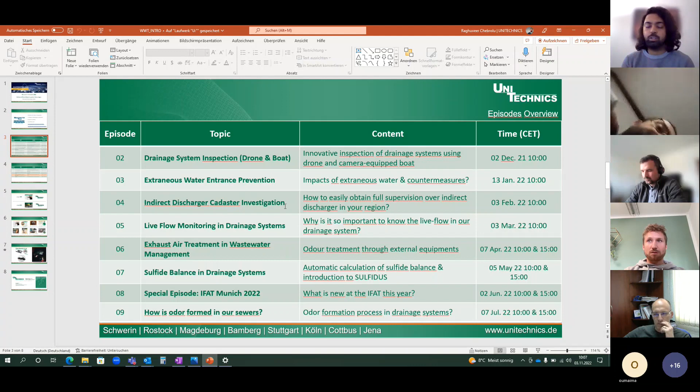So today, as you can see, today is episode 13. It's called Outlook of Futural Sewer Inspection Technologies. And so today we are going to talk about the drones and the inspection technology.

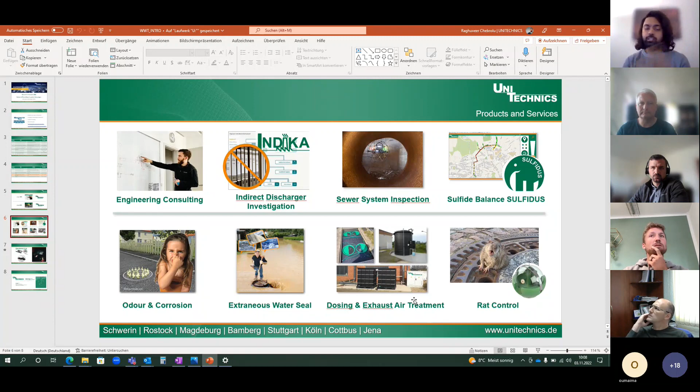So today we are going to do Uni Inspector, which is by Unitechnics. It's also doing the drone inspection together with Inspect Drone.

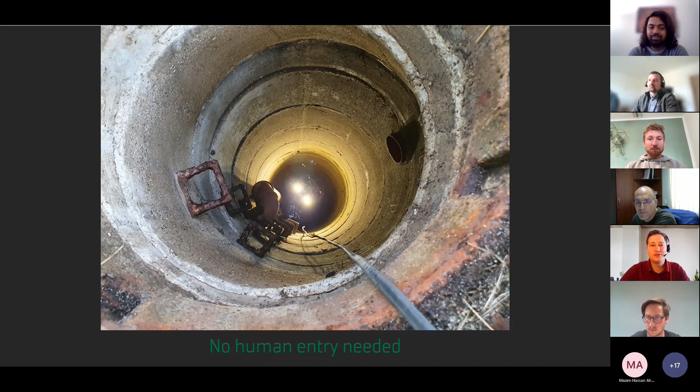And what we can make out of that, I just want to give you a few impressions like this. It's not a moving image, it's just a still image, but you can imagine the water flow on the bottom. It's not something where you want to or even can stand in. So it's a perfect place to fly a drone in. The image that you see here is a real world image taken by the drone. It's not staged or anything. 100% of the lighting is done by the drone. So I think that gives a good idea of what's possible at the moment already.

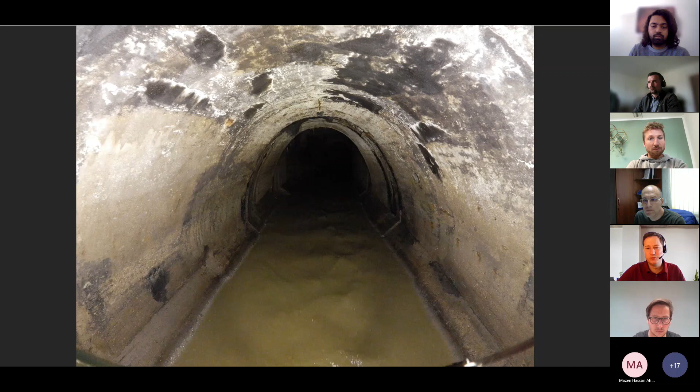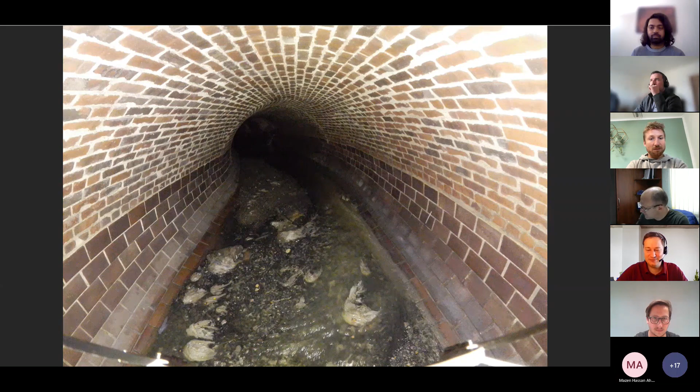Some more nice images of what the world underneath Germany looks like, at least in some towns. All kinds of different profiles here. All kinds of challenges, of course. Not the easiest way to bring a drone inside the sewer, not the easiest place to fly around. As you can surely imagine, there is no GPS assistance. So the drone relies at the moment on its sensors, distance sensors or optical sensors. I will get into the technical details of the technology that we're using in a bit. Just wanted to start with some impressions, get you into the flow.

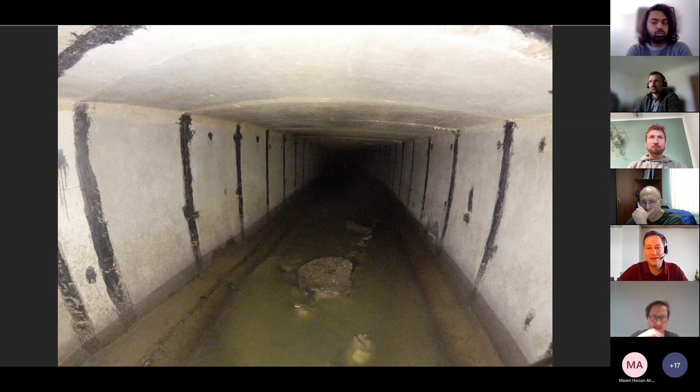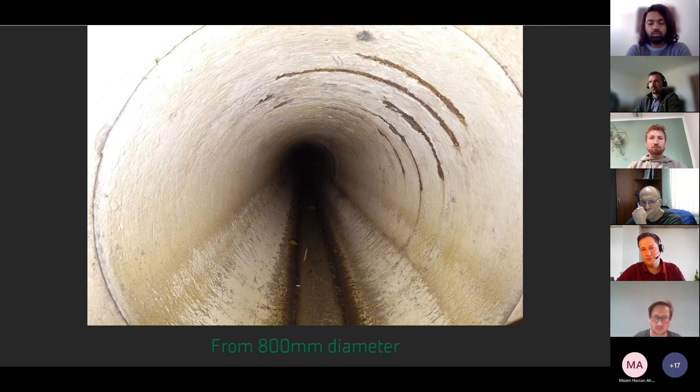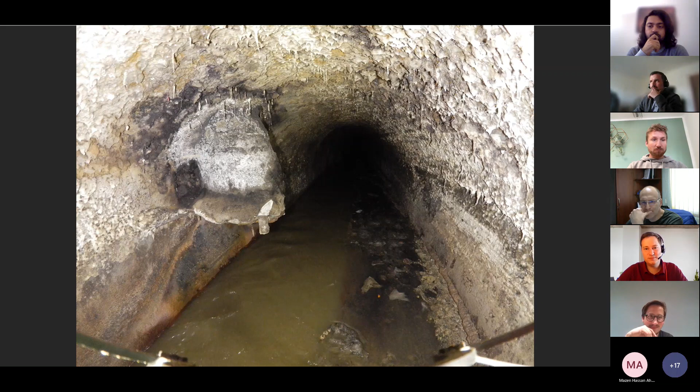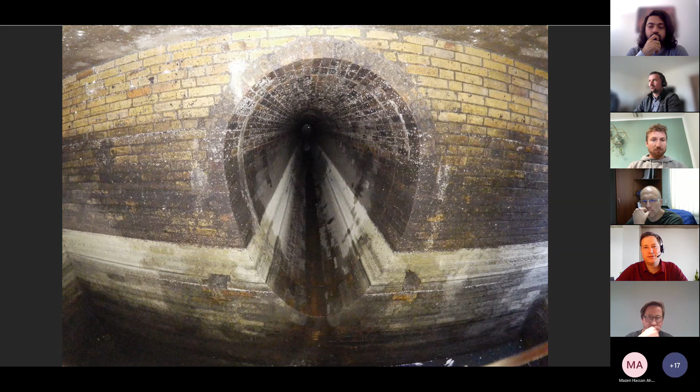Doing inspections at the moment starting at 800 millimeters diameter. There's basically no limit on the upper end. We get to see some places that are quite interesting, I would say. Really interesting, all kinds of places. So that is, let's say, the current possibilities, or what we've been doing for the past 2 years with the drones that we have at the moment.

Just realizing that I forgot to put in the specs of the current drone, but maybe some of you have had some contact with drones in sewers or drones in industrial assets. You might have heard of Flyability. It's a Swiss drone manufacturer. They produce specialized drones for indoor inspections, and for the images that you've seen here, we're using the Flyability Elios 2 drone. It's highly specialized for these confined space environments. From our experience so far, it's the best drone on the market at the moment for these tasks.

There are actually others coming up with new products, but it's still a very small market. It's a very dynamic market. There's lots of development, and well, the latest I'm going to show you.

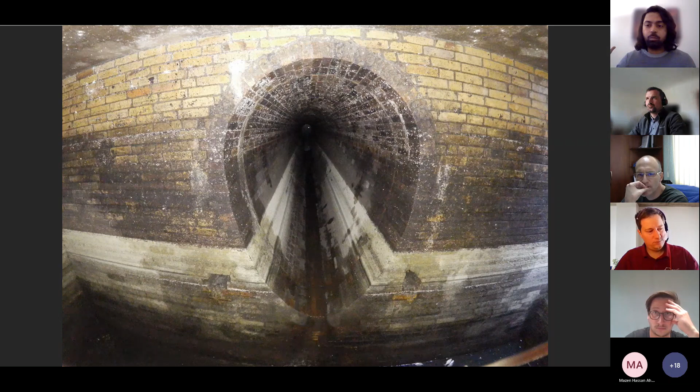In some projects, customers say the structure is so many years old and the plan is outdated. They don't even have a plan, and some are from before World War II. So these structures need a new plan. They want GIS data and a plan where they can see all the measurements, something like 3D and 2D pictures which can be used to make a report, or to reactivate or restructure the structures or basins.

So in these cases, we mostly use drones instead of people. Like Simon said earlier, there are two kinds of drones: Elios 2 and Elios 3. Elios 2 has a small diameter compared to Elios 3. I guess Simon has the pictures later. I will, I think it should be on the next slide. That's why I'm sticking with this image here for so long.

Okay, then I'll give back to Simon. Sorry. Thanks a lot for the additional information. No problem. Right, underground structures is the word I was looking for.

So in this case, I think there's no possibility to enter directly into this structure. You have to go through the egg profile. All right, let's go forward. There's something interesting as well.

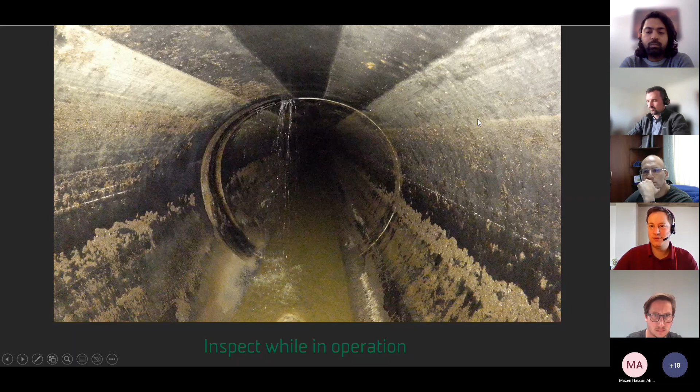Right. So one more thing that we are doing in wastewater plants is inspection of these fouling towers or fouling structures, fouling tanks. Once again, you don't need human entry. You don't need scaffolding in here, as long as you don't do any mechanical maintenance. You just want to know, is my structure doing well? Are all the screws in place? Are all the stabilization constructions in place? Is there corrosion or something? We save our customers a lot of money by just flying in there and not needing any scaffolding.

In this example here, everything was fully pumped out. We've also been doing inspections where you had a few meters of sludge still inside. So of course, doing it manually was completely out of the question, but emptying it even more would have been too expensive. So we just inspected the 80% which was above the sludge line, giving really good results here. Actually, the drone that you see here is the one that I'm going to talk about.

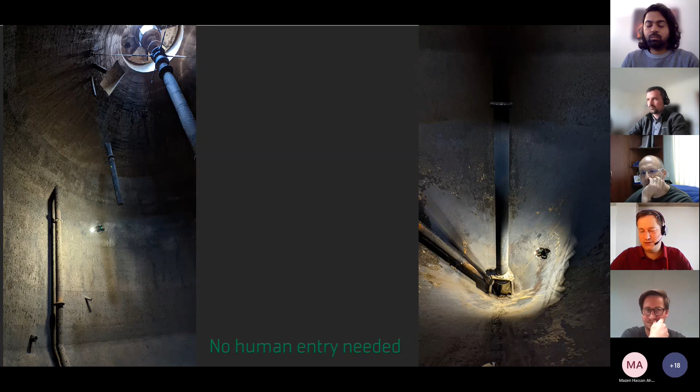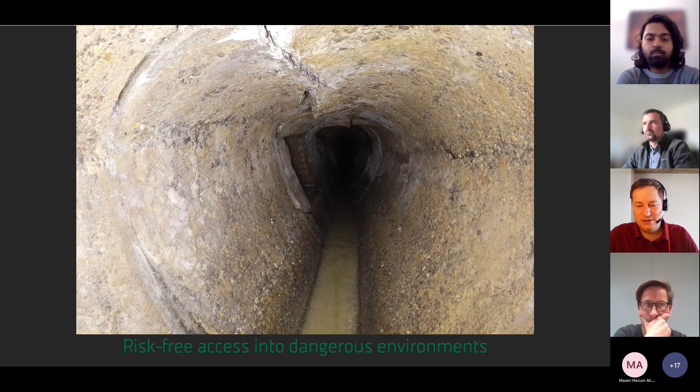Also a very good example, I think, of why using a drone does very much for the safety of workers. Obviously, this here should not look like this. It's a pretty dangerous environment. Also here we have a broken-in part of the earth around the sewer. I think it's a canalized stream here.

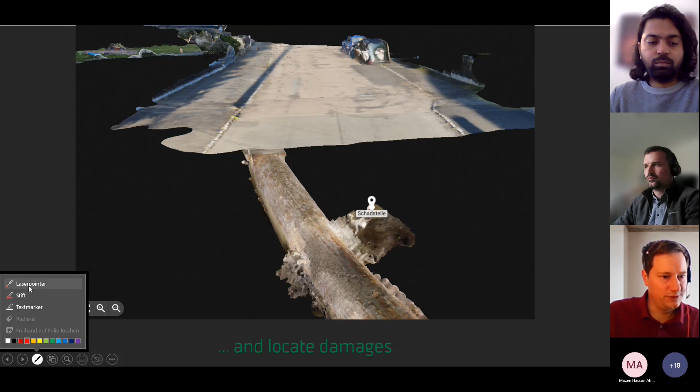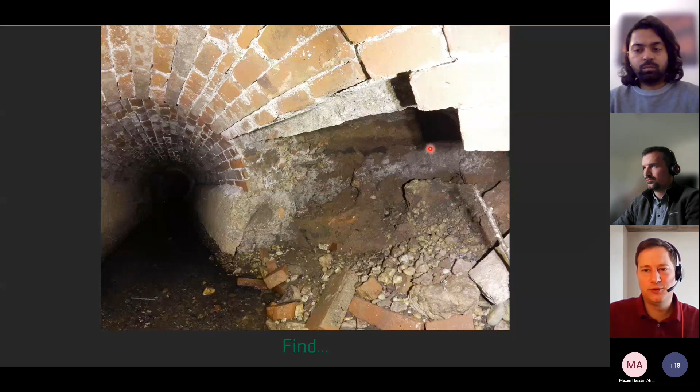And of course, we don't only want to find this, but we want to locate damages. That's one thing which started about 2 years ago. Technology made it possible to locate the damages in 3D models. What you can see right here is a combination of a photogrammetric model of the sewer, which you see in the lower middle. Right here you have the sewer going under the road, and right here is just what you've seen on the right. This damage, we've been flying even closer and looking up, and it's almost going up right underneath the road surface.

So here we combined this 3D model with image data from a drone flying on the outside. That makes it possible to have perfect georeferencing. So with this point that is set here, you can have the georeferenced coordinates. You can send someone with a GPS device out here and actually pinpoint the place on the road where this hole is. In this case, they went ahead and directly closed down the part of the road where the hole was, and started excavation, I think, the following week, to avoid any dangers of the road collapsing.

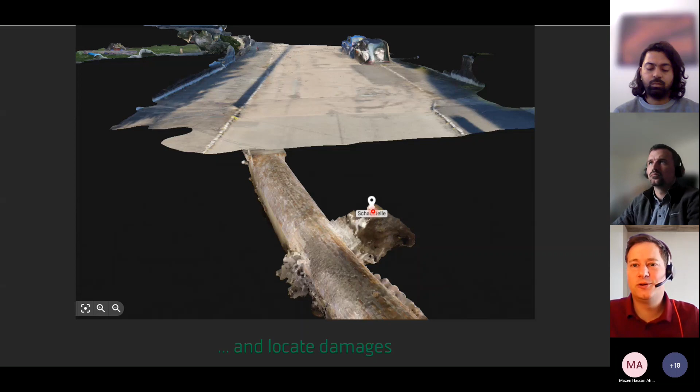And I think it also shows one of the great advantages of using a drone. It is very quick. For this whole project, including flying several times into the sewer, flying on the outside, producing the 3D model, and getting the exact coordinate, it took maybe 4 hours, including all computer processing. The flying itself was maybe 25 minutes maximum.

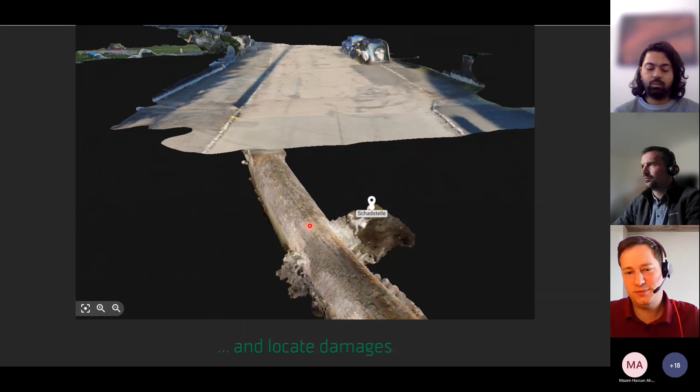One really cool thing, just because it makes it so much more interesting: you get into places that are basically unknown. These parts of your sewer system that nobody dares to go in, so you find these interesting structures like this pipe here going right through the middle. Nobody really knows if the pipe is still active. A few meters back here, there was a pipe which was not connected to anything. Always good to know what's underground.

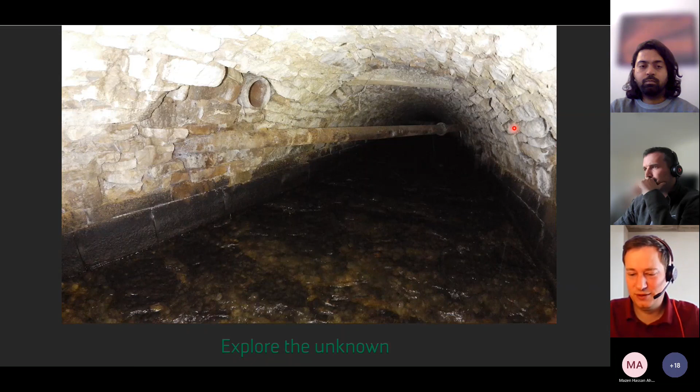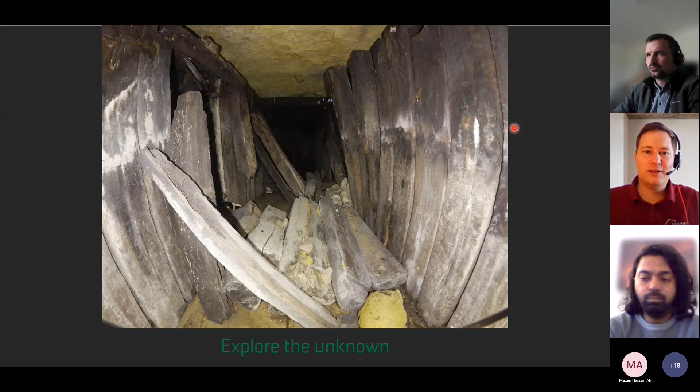I think this is one of the last examples from the old data, where we explored a World War II air raid shelter, which was accidentally found underneath the road. And as you can see, that's not a place you want to go in manually. Already broken down. Mostly you can see on the ceiling, it's the bare sandstone, or not even stone. It's more like compressed sand. Definitely not safe.

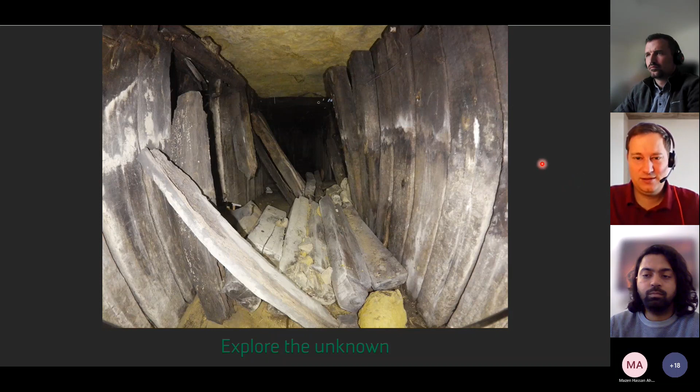All right, but we want to talk the latest technology, of course, and here we have the Elios 3 drone, which is the latest drone from the manufacturer Flyability. We've been operating this since April of this year. We've been involved from the side of Inspect Drone directly in the development, so we had a bit of early access. And what makes this drone completely different to everything before is mostly the payload. This drone is constructed to carry payloads, and especially what we have right now is a LiDAR laser scanner module.

This allows you various things. Most importantly, it allows in-flight localization. So you have a live 3D map of the asset that you're flying in, and you have the exact position of the drone inside the 3D model. This allows you to exactly know where am I, where have I been before, so you don't miss any spot when you're trying to get full coverage of the whole.

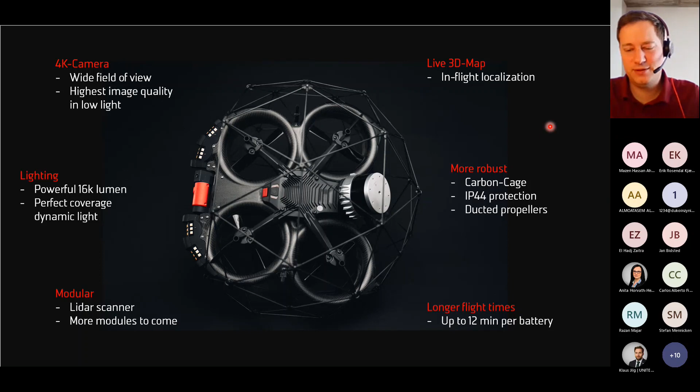And now, what's interesting is, of course, the data. I've got some examples for you here. The laser scanner allows you to do survey grade laser scanning, so you have very high resolution laser scans. The scanner is an Ouster OS0 Pro-32 laser scanner. If anyone is from that field, you probably know what it means. To everyone else, it's an industrial grade laser scanner, scanning around 150,000 points per second. It's a 360-degree rotating laser, picking points in any direction.

And what you see here is a large ducted stream. On the right side here, it's coming from outside. It's going underneath the road.

You have entrance, manhole here. You have a bigger one right here. And with this data, you can see it's not perfect here in this instance, but here there's a transition from one profile to the next. There's another transition right here. I think there's a transition hidden somewhere behind there.

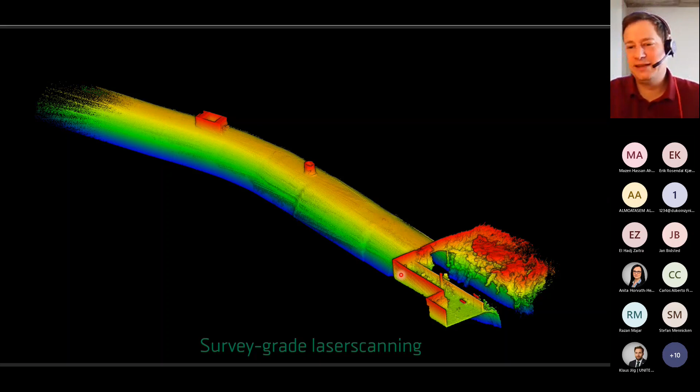So it's the perfect tool for really surveying any constructions which are pretty old. In this case, I think it was built in the 1910s or 1920s. And of course, you can imagine that the town above the construction here has changed a lot since then. The plans are still the original plans, but you never know. So it's a perfect way to update your plans.

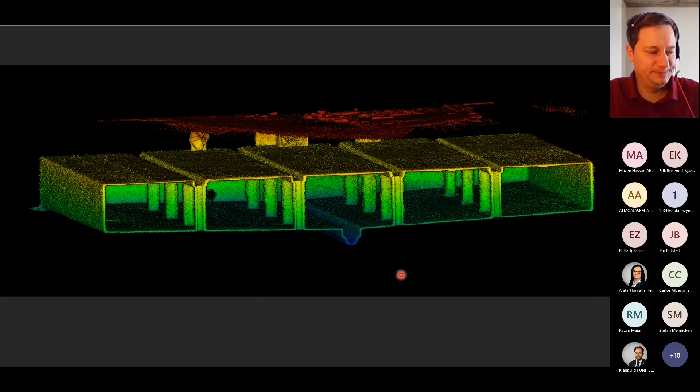This is from a rainwater retention basin, a very nice example, I think, showing again the great advantage. You have lots of pillars in here. If you would like to scan it manually, you have to place your stationary laser scanner in lots and lots of places just to get a good coverage of all the pillars.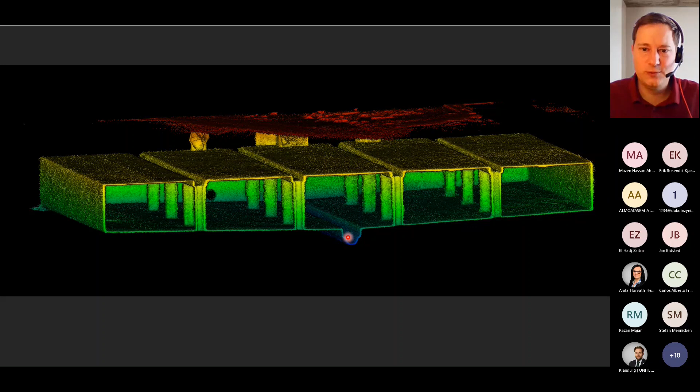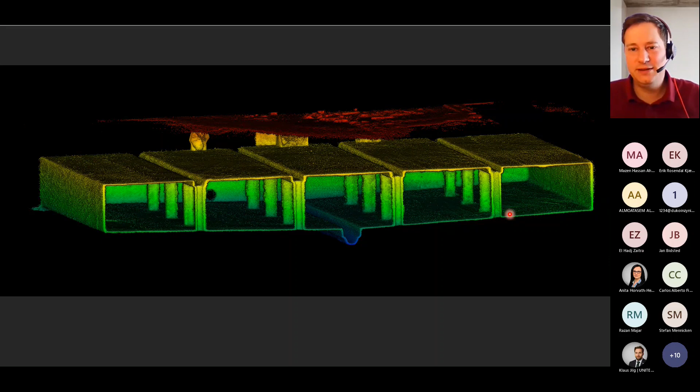Also, on the bottom here there's a dry weather duct where there's always a little bit of water flowing. As you can hopefully see here, the scanner even scanned the bottom. There was not a lot of water flowing, so it was able to pick up the bottom as well. And that all was done in just one flight. It's like an 8-minute flight, and the complete scan of this was done.

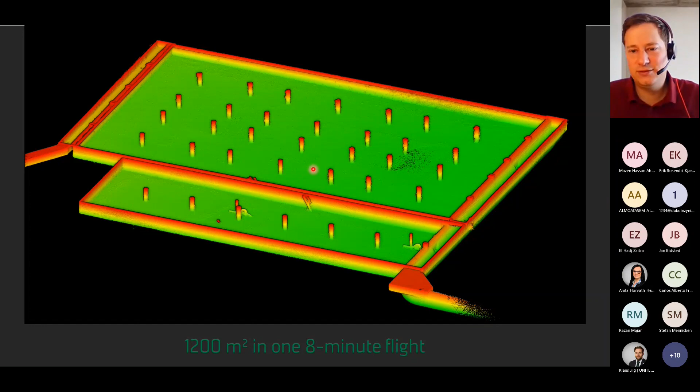That's an even bigger one. The big basin here, I've done a horizontal cut to show the inside. It's about 1,200 square meters. This is completely done in one flight. The second basin is done in a second flight simply because there's no direct connection that could be used. And I think we had a third flight for this part here, as the drone couldn't get through. All in all, the complete scan was a job of maybe 1.5 hours, including repositioning, etc.

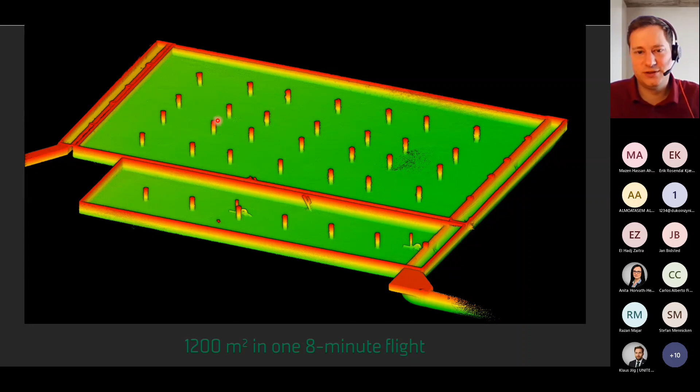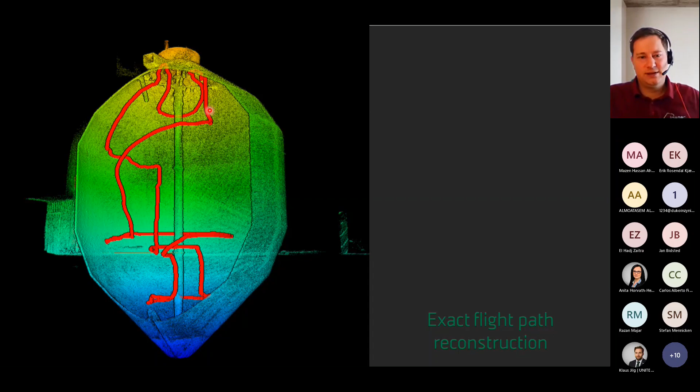I think I've mentioned this before. With the 3D modeling also comes the great possibility to reconstruct the flight path. What you see in red here is the position of the drone at any given time. On the next slide it's even better to see. This is the software used for making the drone data really usable. On the left side you have the 3D model from the laser scan. It's optically not that nice because it's not the latest version of the software.

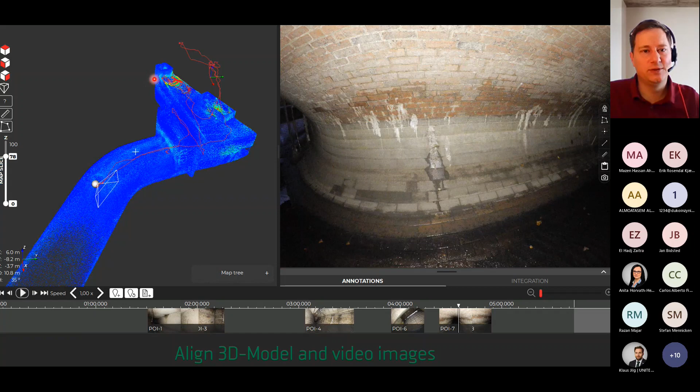But still, you can see here in white the position of the drone, and synchronized with it on the right side the image taken at exactly that place. So for the detection of any defects, you know very exactly where the defect is. You can do measurements here, so the dimensions are all perfectly recorded. And you can pick any position, any frame in the video down here that you want to see, and have the perfect connection to the position of the drone at the given time.

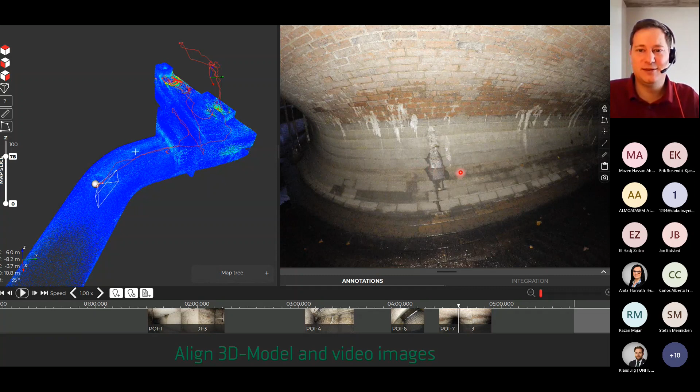Which, of course, for everyone working with sewers, you absolutely need. You cannot guess where the defect is. So, that was the things that we are doing right now.

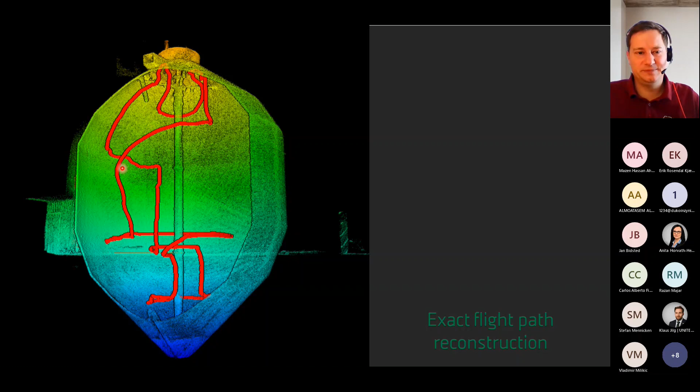To give a little idea of what we think will be coming: when you look at an image like this one here, you're able to record flight paths and do perfect 3D scans of assets. So one of the targets for future inspections is that this does not need to be done fully manually by a pilot, but you can program your drones. If you take this construction here, you can program that once, then you just repeat the flight automatically. Autonomy then is, of course, the next very big challenge coming up.

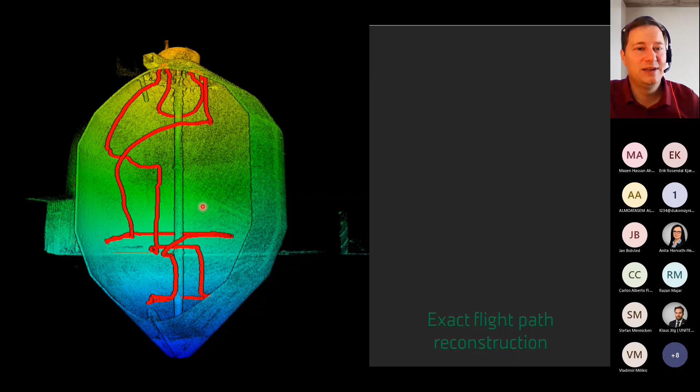I'm sure that everyone working with sewers is crossing fingers for that to work, because the sewers, look at that. It's a really complex structure. There's a lot to find. It would be really nice to just drop in a drone or whatever robot you want to use and tell it, go from here to the next opening, come out again, change or recharge the battery, upload your data, and continue on. And it's actually being worked on in various places, starting from the drone itself, and of course the software side.

So at the moment, what I guess is the latest technology regarding the automation is AI-driven inspection software. So you've got input like the drone video data and the 3D model data, and then an AI software is automatically detecting cracks and doing the full visual inspection, basically, that you usually have to do manually. All the coding of damages, and also the report creation.

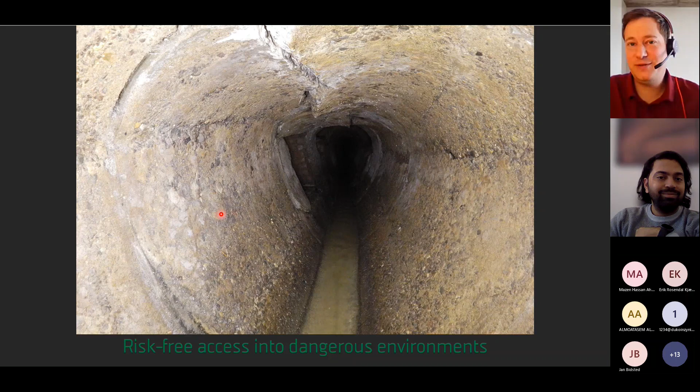So automation of the inspection vehicles, drones, and of course also the automation of the reporting and the optical... How do I put this? Yeah, well, the optical inspection. So you don't have to work for it. Let the computers work for you. That would be, I think, good for everyone, right? So yeah, that's it from me.

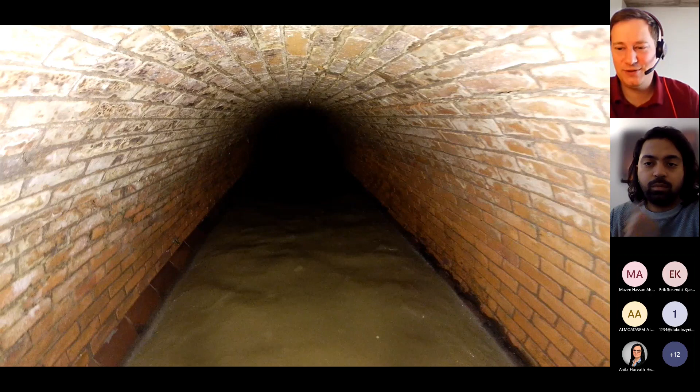I'm actually not sure about the dimensions here. Just to give you a rough idea, it's about 2 by 2 meters. So it's not a perfectly round profile. Probably like 1.9 meters wide and maybe 2.20 meters tall, something like that. It's actually an oval shape. It's not round, but it's kind of an oval shape. I think the bottom part is round and the top shape... Yeah, it's like an egg, parabolic. So yeah, it's egg shaped.

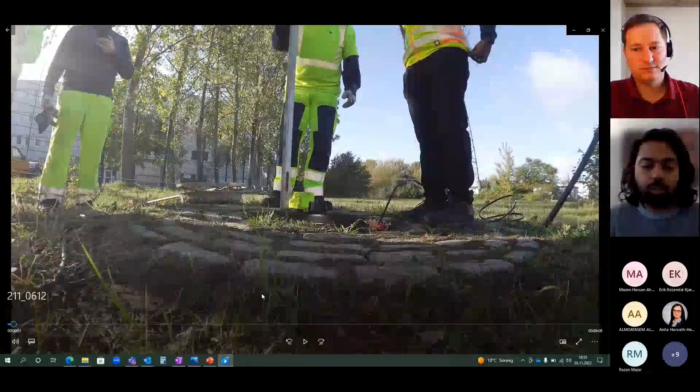So now I'm going to show my video for a few minutes, from the recent inspection in Berlin. I hope we have some questions after that. Let me share my screen. Can you guys see my screen? As you can see here, we put the antenna inside the canal. We need to do that first before putting the drone in, so that it gets the GPS and signal as well.

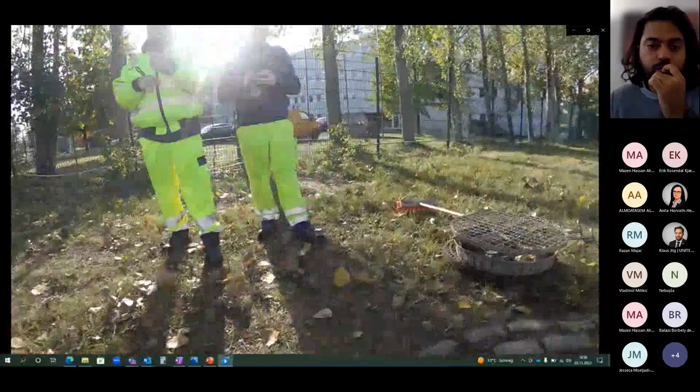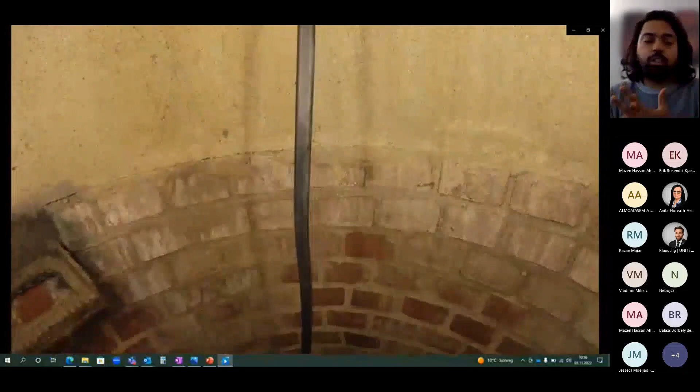As you can see, this is a rainwater channel and a rainwater basin, and it goes into a small channel which connects into the river. So this is a rainwater structure, and the customer wants to know how it looks, what problems it has and what damages it has inside the pipe without sending a person in.

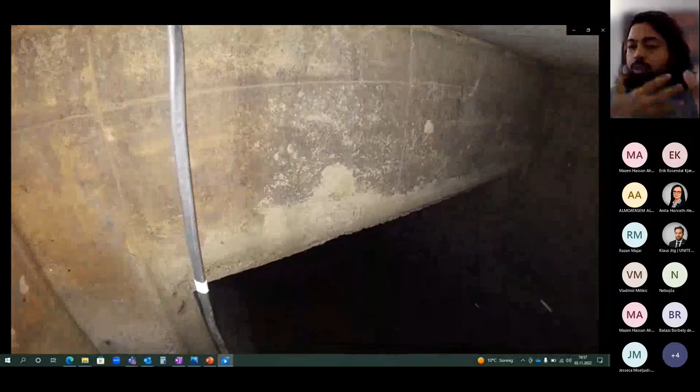It's a big structure, and it's actually square, like a box profile. The sewer is not round, it's like a box, and it also has a bit of water in. What makes it extraordinary is this drone can find the depth of the water. It can even measure inside the water, and you can see the 3D pictures even under the water. That's new for us; we never imagined it can do that.

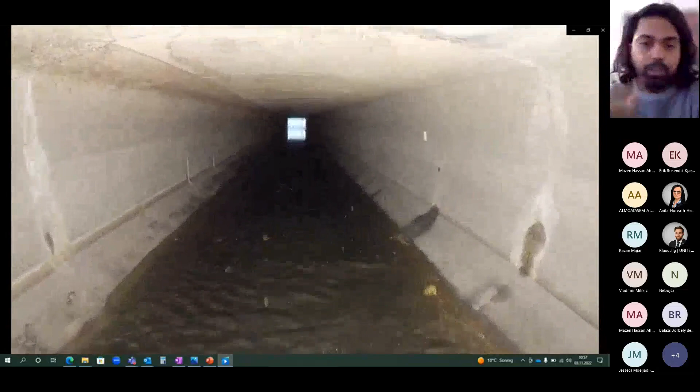Here you can see some damages on the left, and the exact box structure with rectangular dimensions. We went through with the drone till the screen which stops the waste going into the channel. This is the wastewater collection sump, and then it flows through it. So we went till the end.

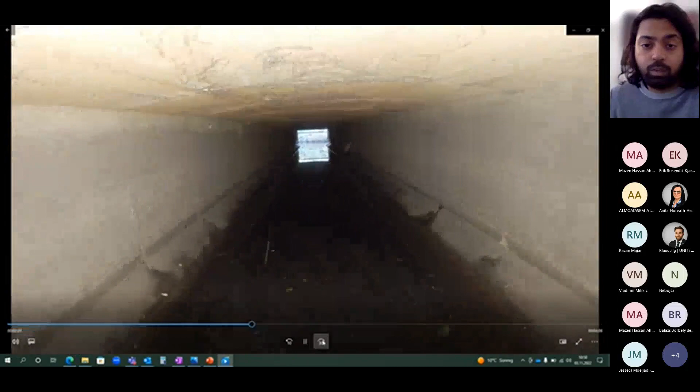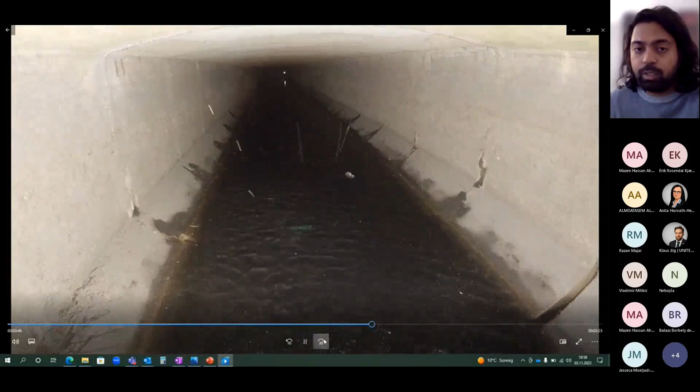We went till the screen, and here you can see all the damages, the corrosion and the structural problems on the screen. Then we got back, and here you can see the damages as well as the slime and everything.

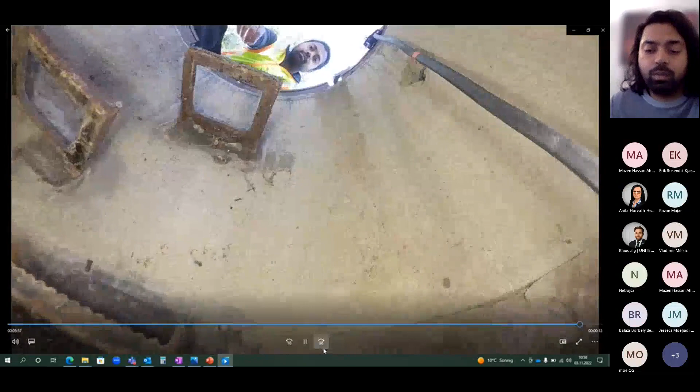So that's a small video from myself. I mean, I made this video. I wanted to show this video so that you guys can have more of an idea of how it's going.

Hello? Cool. Can you guys hear me? Yes, yes. Yes, we can hear you.

I have a question when it comes to flying. How would you control it when it's down in the sewers? Is it like first person? Yes. So you have a direct video link. You get the live video feed from the main camera for navigation. And when flying the Elios 3, you also get the live 3D point cloud on a tablet attached to the remote controller.

Okay. It's basically like a normal drone, like a DJI Mavic, but this also has a big screen connected to your controls, where you can see the live video. You can stop at a certain place, control it with your remote control, change the flight path, go up and down and move in whichever direction you want, just like a normal remote control car. You control it from the ground and see what's happening down there.

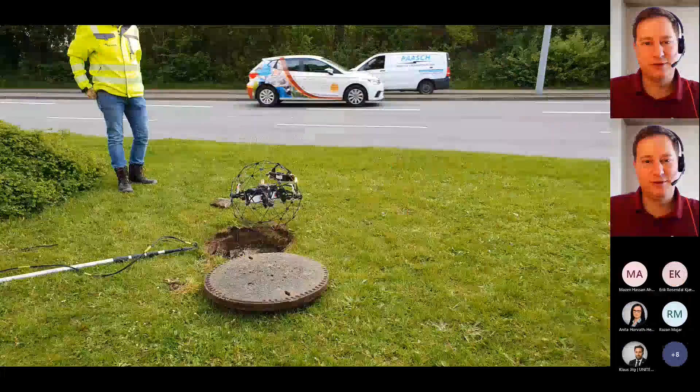Okay. Cool. Thanks. So any more questions? I'm looking for a video actually. Let me show it quickly where you can see the drone starting, giving an idea what it looks like. So this is the Elios 2. Ah, yeah, that's how it looks.

Starting on the outside, the cable that you can see lying on the ground is the antenna extension going down, and the drone is just flying through the manhole here. And from that point on, you only have the possibility to steer it by looking at the live FPV video. Yeah, exactly. Which is actually not that easy, as you can imagine.

Mr. Eshan Sabeti has a question. I'm sorry because I joined late, and maybe my question was answered in the presentation. But if it's broken, or there is some problem with the drone and it's gone, how should we go and find it?

My second question is about how many meters it can go. For example, from manhole to manhole we have 50 to 70 meters based on the standards. Can it go that far or not? And does it have any sensors, in case I make a mistake, to avoid hitting the wall or something like that? Is there any sensor that controls it? Thank you.